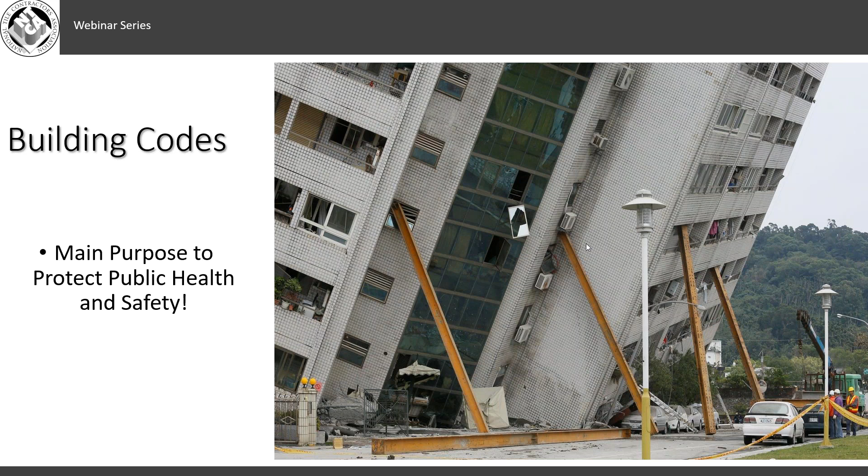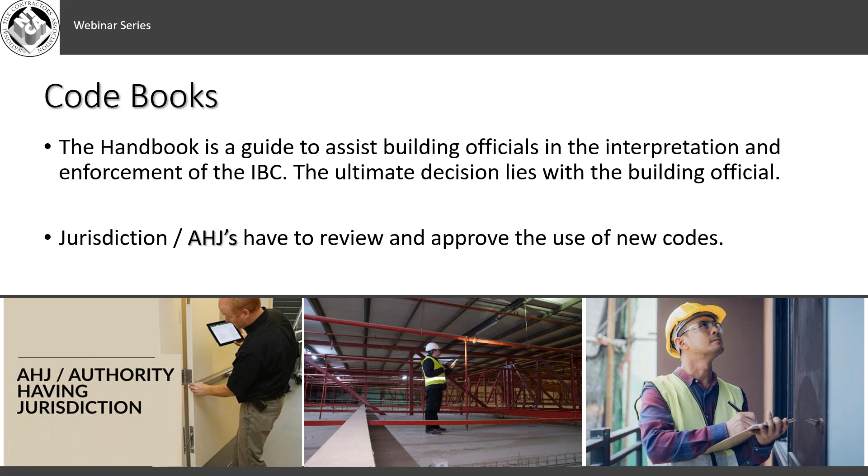So we have a whole series of code books. These are guides for the officials, or what we call AHJs, authority having jurisdictions, and they review these codes. There's a whole process as they update the codes every 3 to 5 years typically, and these are called our model building codes. Now, the 3 or 4 big ones: the International Building Code covers commercial structures. IRC, the Residential Building Code, covers single family homes, 2-family structures. So if it's a multi-family high-rise, that's going to fall into the International Building Code.

Again, single family homes, and then we have our two plumbing codes. It's kind of divided up which states cover which codes. And then there's a lot of other codes. Very important, of course, is the fire code, mechanical code, existing building, tenant improvement codes, that kind of things.

So these codes, depending on which code it is, are updated every 3 to 5 years. There's a very long update cycle. As soon as they publish a code, they actually start the revision process again. They're voted on, approved, go through a comment period, and then finally adopted as these model codes.

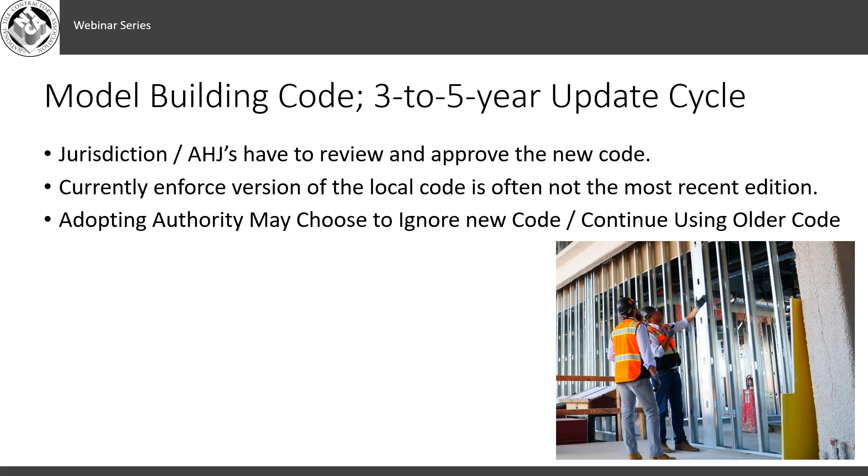The model codes are not law yet. They're just that, a model code, there for the taking for all the states that have it. They can choose to ignore these codes, or they can update them to the newer codes. So we're going to touch on this a little bit later, but the model codes have no legal status until adopted by the local authorities having jurisdiction.

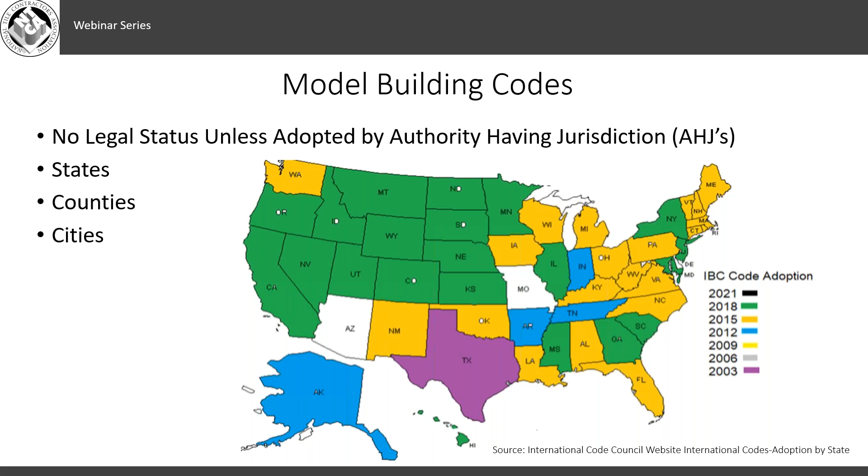So as you can see here, it varies widely by the states. In some of these states, there's a home rule that allows the counties and even the cities to adopt what they want. So until that state, county, or city actually adopts those codes, they're not enforced. We'll cover a little bit of the differences here, but you can kind of see it widely varies throughout the United States.

Now, the states reserve the power for these building codes given to them underneath the Constitution, the 10th Amendment. The exceptions would be buildings built across the United States, for example federal buildings built in each state but owned by the U.S. government. Those are going to have their own standards. Manufactured homes have a set standard because these can be built in one state, sold in another state. And the same process for these pre-construction, modular buildings they're putting up now. Those are going to be guided by one building code.

So we mentioned the home rule. Each state is allowed to do what they will. They can give the authority to the counties. They can give the authority to the local cities on whether they want to adopt these amendments or not. The authorities having jurisdiction, the localities can adopt these, and even the states can make it so that some have to adopt the whole code and can only make stricter restrictions. Some states allow them to change anything in that model code they want. So again, it varies state by state.

So when you're looking at the codes in your state, you want to check with your local authorities because they're the ones that are putting that code into place. They're the ones that are going to do the inspection. What we're giving you here is a general overview so you have an understanding of the codes. The new big change coming up is with the large format, large panel tiles that we have coming into play here.

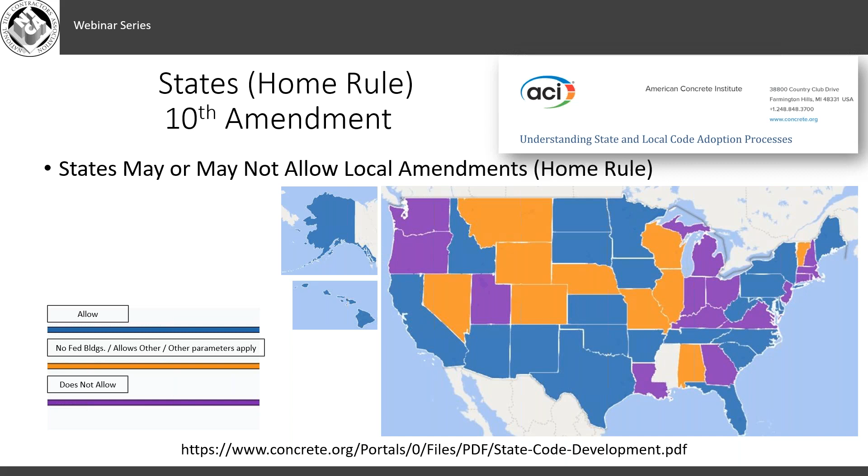So again, each state has local jurisdiction and it's a unique code for that state or city. These are enacted by the legislations, and that's why it's very important to empower the city council, giving them that. They empower the code enforcements. They can go out and do local code enforcements, whether it be the fire code, the building codes, mechanical codes, anything like that.

Now, the states again have the right to apply the code, and we talked about how different that is. So for example, Texas is using the 2003 International Building Code. They have not adopted any of the newer codes. They have very loose guidelines for construction, and especially for zoning. You can build a house right next to an amusement park, or an amusement park right next to a house. And so that will change which codes you're looking at.

So Indiana, in the blue there, you see some of the states using the 2012 cycle International Building Code model. In the yellow, they're adopting a little bit newer ones, 2015, and California and all the other green states are using 2018. So no one is currently under the 2021 IBC code yet. And again, the states have to review it and pass it on to the cities where they are going to adopt that code. For example, Arizona kind of skipped the 2015 code. They went from 2012 to 2018. They never went ahead and adopted it.

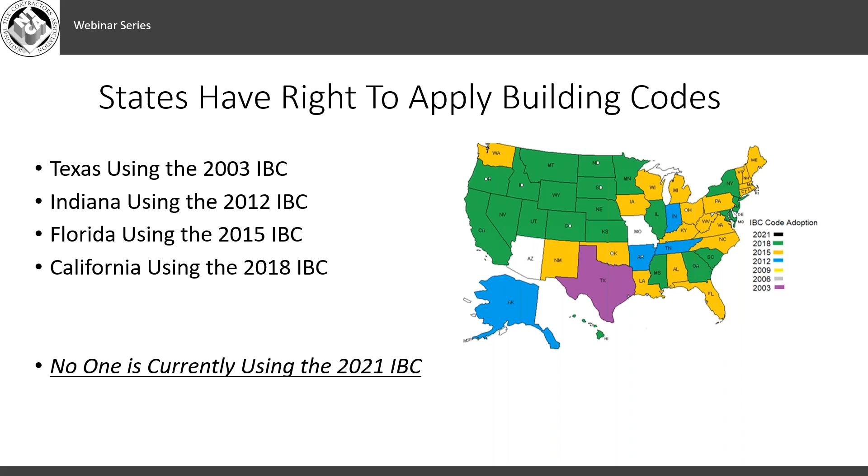So these are the IBC. They're produced by the International Code Council. Again, the International Building Code comes out every 3 years.

And now in Chapter 14, in the exterior adhered masonry veneer porcelain, 2021 is the big change that's coming up. So to give you a little view of what was in the past - not going too far back - in 2009, Chapter 14 adhered masonry veneers should comply with the Masonry Society Handbook, the TMS 402 and ACI 530, section 6.1, and this limited adhered masonry veneer unit sizes to 5 square feet in total face area.

And shall not weigh more than 15 pounds per square foot. Now, when I would go out to the code officials, the AHJs, and ask them about this, they would tell me porcelain tile did not have any code restrictions - and again this was only a couple. They would say this referred to masonry, whether it be brick, block, stone, manufactured stone, concrete tiles - those type of areas it would refer to. And some did kind of consider tile in the adhered masonry veneers.

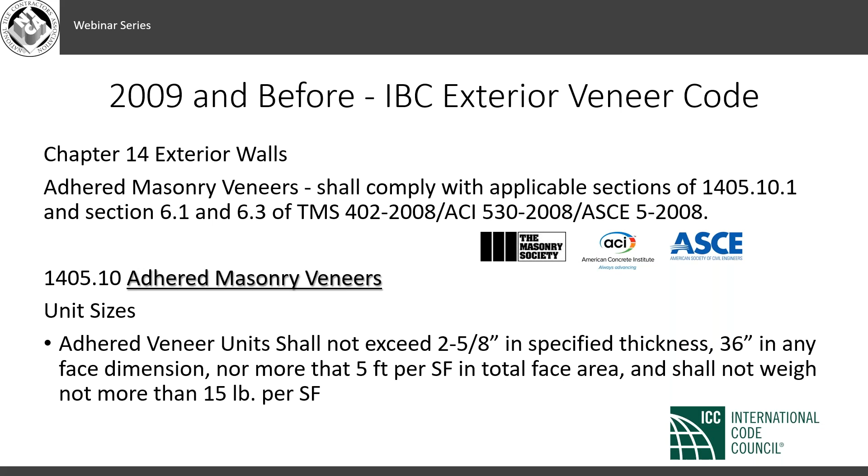Now, in 2012, they changed that code to reduce the area, size, and weight of that tile assembly. They reduced it quite a bit, down to 3 square feet in face area. So that was the big change there, and that really restricted us on what we could put on the exteriors of tiles.

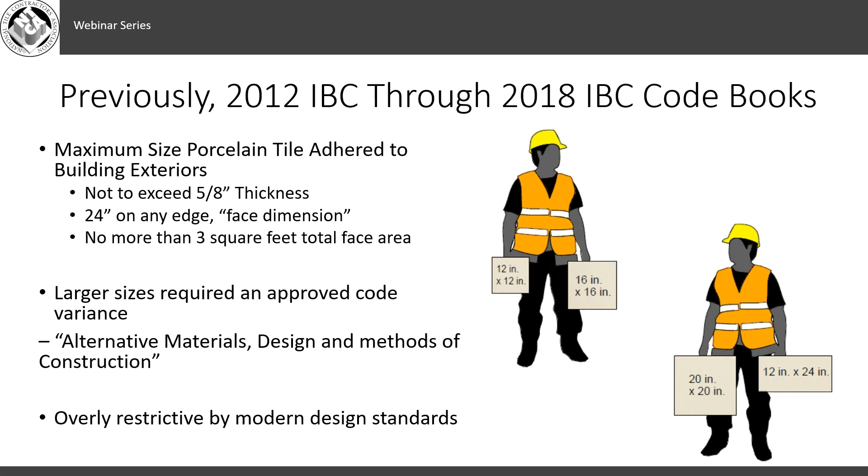We used a lot of times an alternative materials design and methods - this is allowed in the building code. In Chapter 1, there's actually a provision for this. They look back on the manufacturers of the adhesives to make these recommendations, and they look at past history, successful projects that have been in your local area. We'll talk about this a little more in Will's part of the presentation, but we can definitely use this in the past.

Just want to make the distinction between interior and exterior. Exterior has its own challenges because of the temperature differentials, the sun, the cold, the heat, the expansion differential between these - that's why they put the restrictions on. On the interior, adhered masonry areas have no size limitations, only by weight. So maximum weight for interiors would be 20 pounds per square foot. Now, as the adhesive manufacturer, I'd probably recommend only about 15 pounds per square foot. And for natural stone, just as a rule of thumb, this is typically going to be about 3/4 of an inch thick. This has not changed in 2021.

I just wanted to give you a little review of that. So again, 2021 has not been adopted yet. For example, the IBC Model Code 2018 was released January 2018. California reviewed it for a year, put it out, had comments, came back and adopted the building code in 2019, but it would not go into effect until January 1st, 2020. So that means the 2018 code has actually only been in effect for 1 year now. So it does take a while to publish these for the states to adopt them.

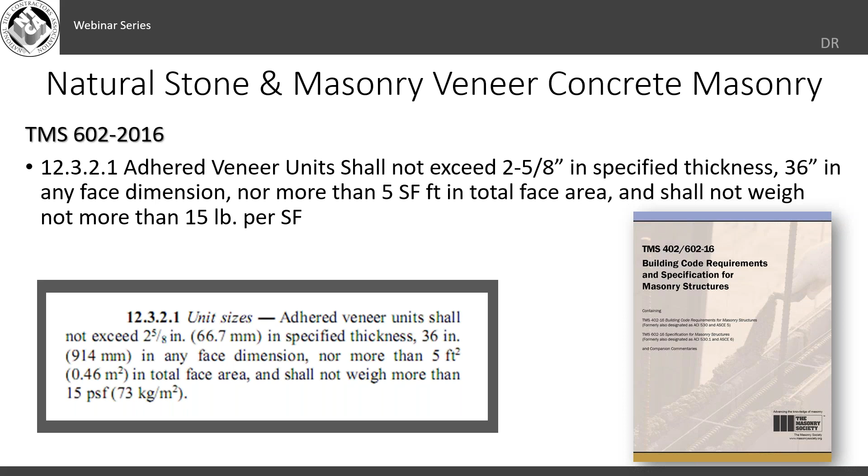We have to remember that's porcelain tile. Anything for manufactured stone, concrete masonries, natural stone, goes back to the old TMS, where the adhered unit shall not be more than 2 5/8 inches in thickness, 36 inches in any face dimension, and no more than 15 pounds per square foot. This is the requirement for masonry, manufactured stone, and this is not for the new GPTP thin panel slabs.

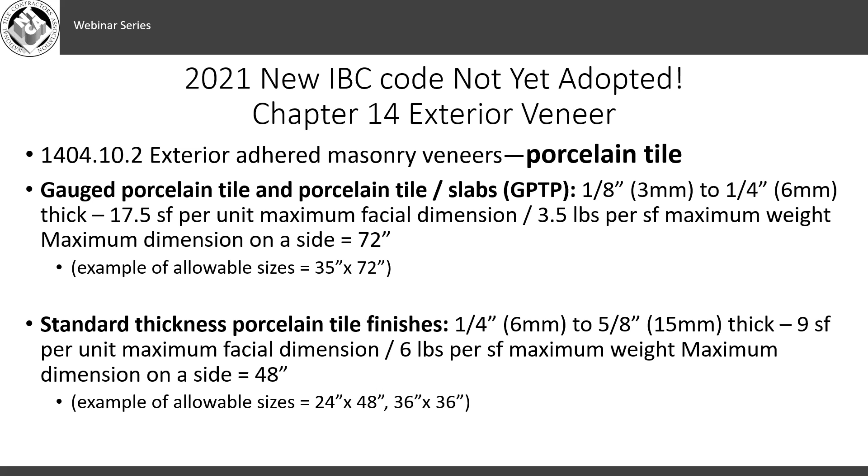One of the things is they do require at least a 50 PSI shear bond strength on that. I've been involved in testing of these after they've been installed. A lot of this is the type of mortar they're going to be using, the application of that mortar, and the coverage rate. The NTCA has the Trowel and Error video, which is excellent if you haven't seen it yet, on getting the proper coverage. I've seen one failure where they used the highest shear bond strength mortar, the most expensive mortar, but they were only getting about 50% coverage on that back.

They tried to use a crosshatch system where they troweled or combed on the substrate in one direction, and thought they would get better coverage if they troweled in the opposite direction. They never got the ridges to collapse - basically the ridges were just sitting upon the ridges. So they got very low bond strength, but just barely passed this 50 PSI shear bond test. They would have had to take out all the tile on that building if they hadn't met that. So it's very important to hit that and get the proper coverage.

A lot of times it will take back buttering. It's very difficult to get these walls that flat that you can just comb it on the substrate, but back troweling is the new terminology that we're using these days - flat troweling that backside of that porcelain tile.

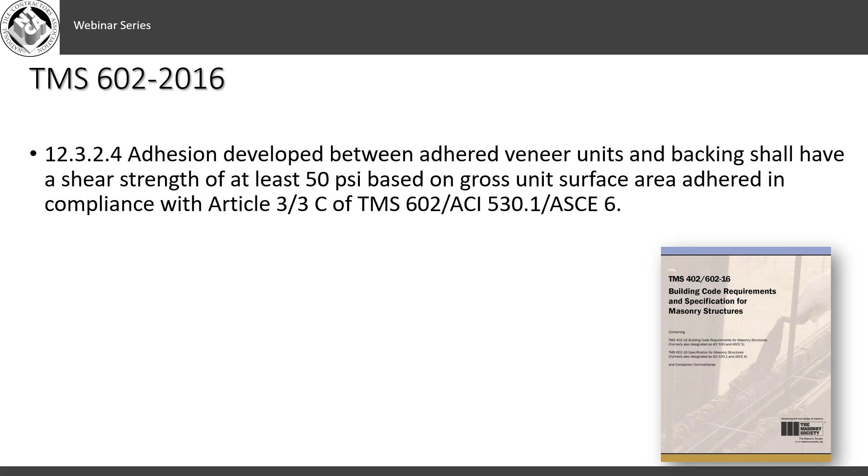Commercial buildings, there are no restrictions for the height. Now, all the time I say hey, there are restrictions - it's 20 feet, it's 30 feet - but in the International Building Code, for commercial buildings, there are no height restrictions, as long as they get that 50 PSI, as long as they can control and restrain differential movement, there's no sagging of those studs or buildings, no deflection in those walls - we can go as high as we want.

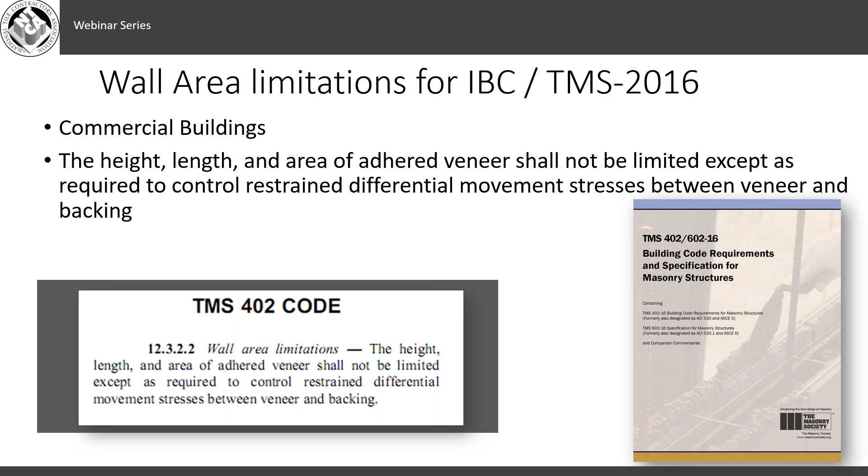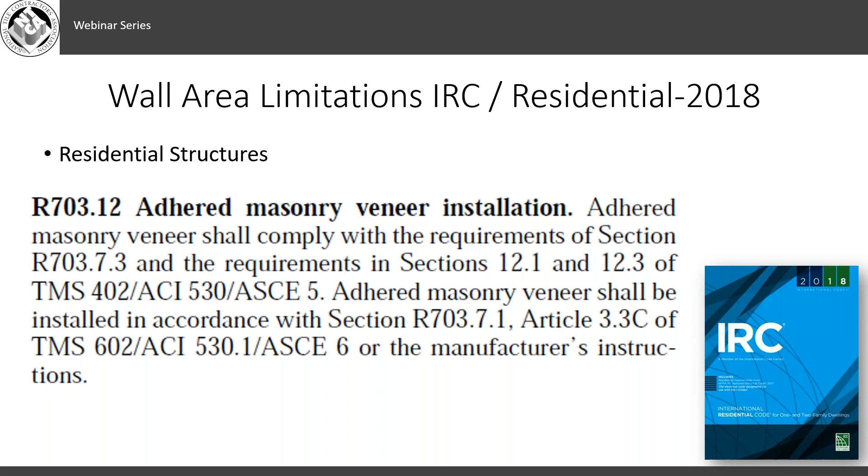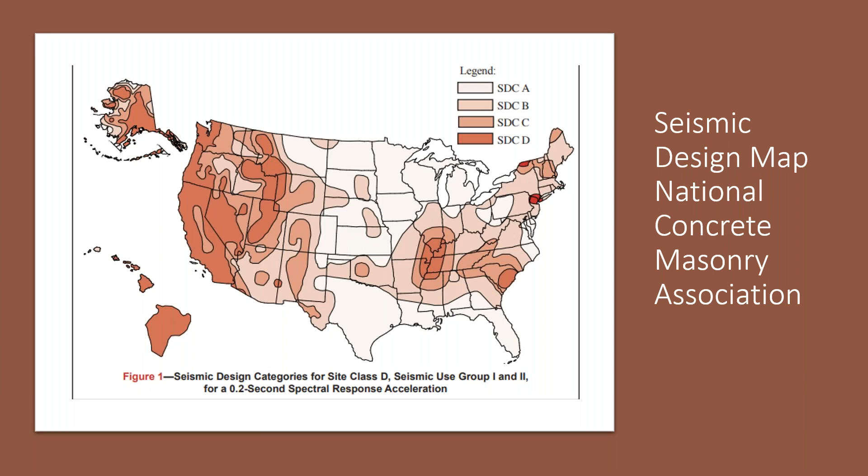Now, I have to bring up that that's different than residential. Again, single family homes, there are limitations on the wall area, how high you can go. They have a chart that's dependent on the seismic map, so it's going to be different across the United States depending on where you're located and which zone you fall into. I'm in Southern California, zone D.

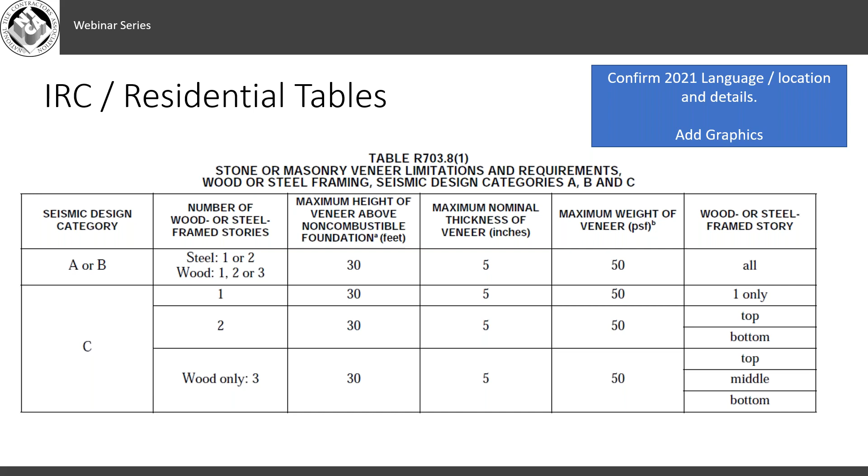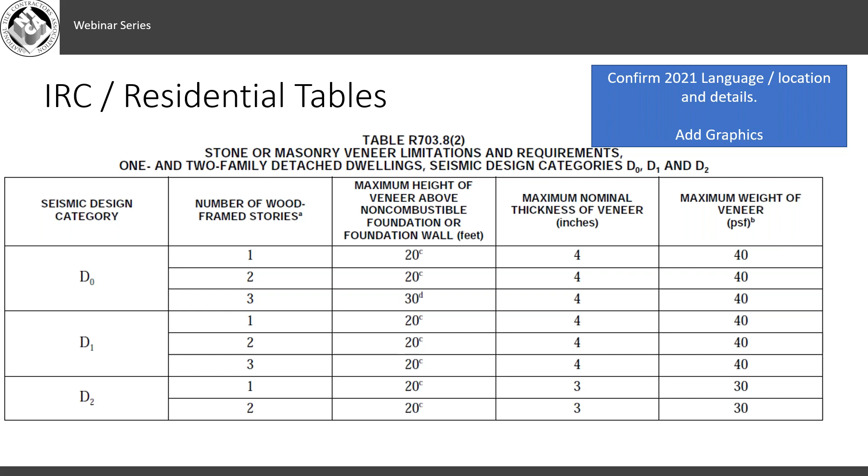Here's ABC, maximum height of veneer above a non-combustible foundation, 30 feet. So that's where you usually hear that, well, you can only go 30 feet high - single family homes, yes. And in SoCal, 20 feet high. Generally that's a 2-story building, so it pretty much covers everything anyways. In residential, you usually don't see too many over 20 feet, so that'll generally fall into that category.

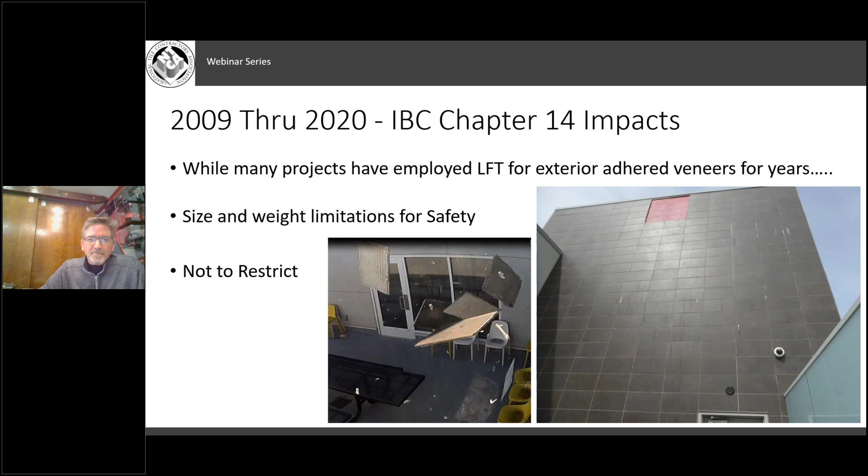Sure, and I'd like to mention that happens more often than you would think. We actually had a building - they had no way to get the moisture out of the wall assembly, and there was no cap on top of that parapet, so moisture was going right down inside that, rusting a lot of that stuff, and you were seeing failures caused by just architectural failure, basically.

The Chapter 14 impacts we've been working through for the past decade have created design challenges, often requiring architects to respecify exterior veneer materials. In some cases, especially with gauge porcelain tile panels, a secondary fabrication method has been required to change sizes to meet current restrictions. Gauge panel manufacturers have begun offering different sizes, not just for exterior but interior use as well. That's definitely played into the code limitations that currently exist.

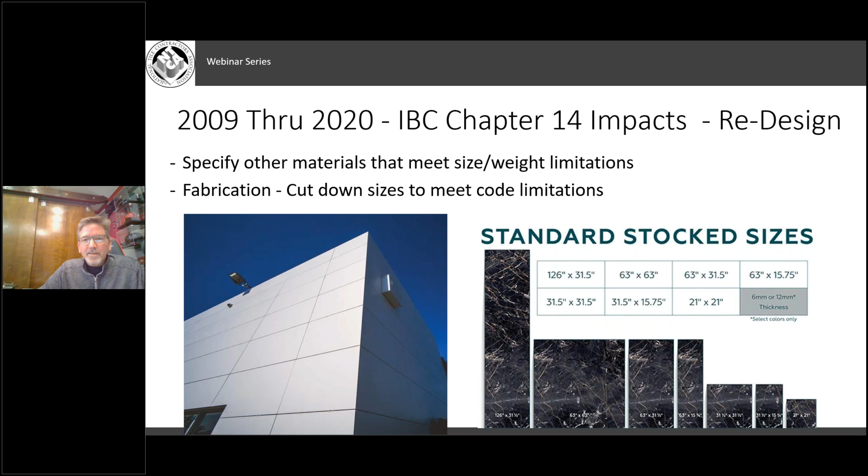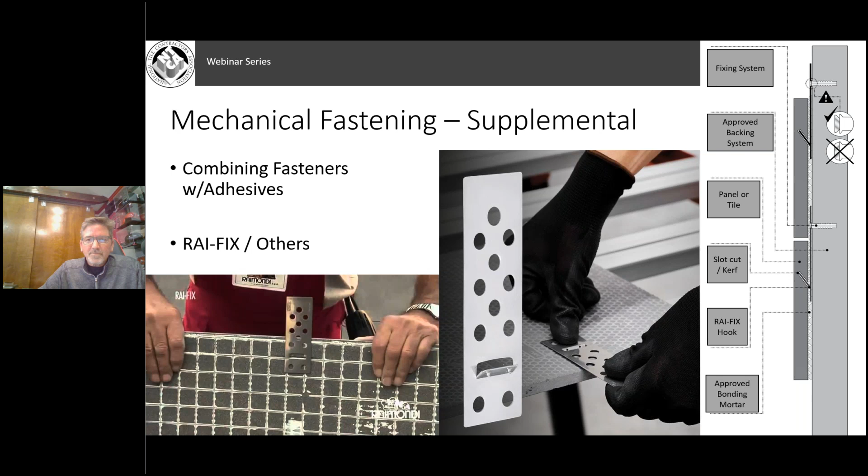Mechanical fastening systems are supplemental to an adhered exterior veneer installation method, working alongside current code limitations. These mechanical systems have gotten more popular and played a key role, enabling installations across various states as an adjunct to the installation assembly. You'd typically use this when your code official had reservations about using tile in a direct adhered system on the side.

This gives code officials confidence to use a direct adhered system along with a mechanical fastening system. Let's talk about the alternative materials process in the IBC, found in Chapter 1, Scope and Admin. It clearly states that codes are not intended to prevent installation or design methods, but to promote safety. This allowance enables alternative materials or larger formatted tile bodies, and has been utilized quite a bit for gauge porcelain tile panels to enable design methods. This is commonly referred to as a variance request — the graphic on the right is a template used on many projects.

Dale, I don't know how many projects you've worked on that have gone through this process. Several. In the old days it was a little tougher, but with the new 2021 code having those larger format tiles, it's pretty much a slam dunk now. In the old days, the liquid applied waterproofing membrane wasn't in the building code, so it was very tough to get approved. But once it was included for a couple years beforehand, substitutions became much easier. It'll be the same with these large porcelain panels — much easier to get approved as an alternate method of installation.

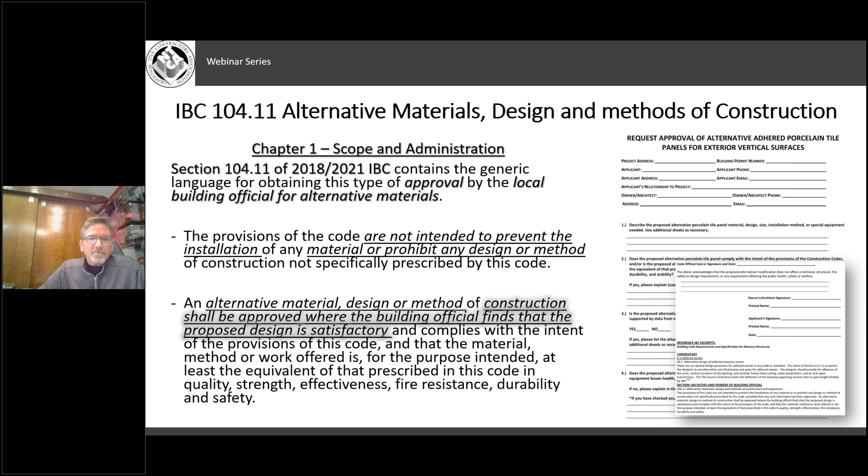Let's talk about the 2021 changes. What really drove the recognition by the IBC and ICC was new technologies with gauge porcelain tiles and ordinary porcelain tiles getting thinner, reducing weight loads — a major concern — along with material definitions for gauge porcelain tile panels published through ANSI A137.3. Also key was the development of the improved modified dry-set cement mortar standard ANSI A118.15, showing much higher bond strengths, partnered with certification for standard tiles through CFI and CTEF, as well as gauge porcelain tile panel trainings executed by manufacturers like ourselves, panel manufacturers, and the ACT program. New tooling developments, even simple things like trowel redesign, have helped improve contact and coverage, well exceeding 50 PSI on an average basis.

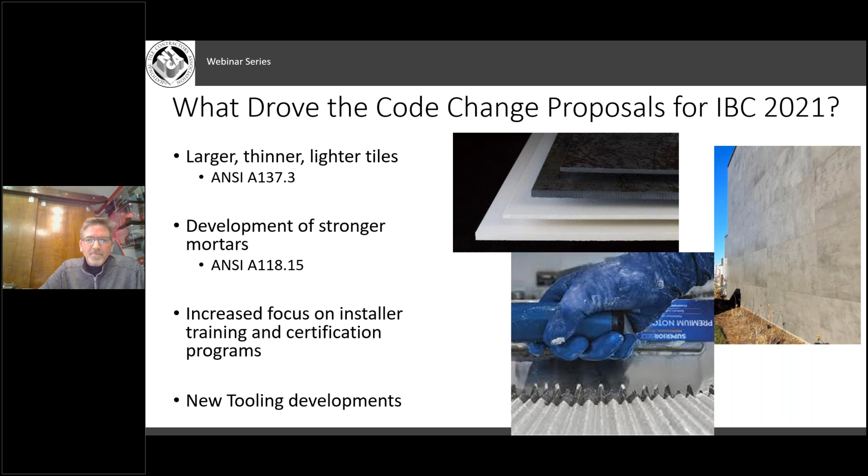The minimum shear bond value of A118.15 is 400 PSI, so I'm absolutely certain that with proper installation, it well exceeds the 50 PSI, and the modification in those bonding mortars can well sustain expansion and freeze-thaw cycling. Just don't forget your movement joints when designing and installing adhered veneers — those are very important. It's critical to get that EJ171 expansion joints detailed by the architect and design engineer.

Let's talk about when this was submitted. It was actually submitted in 2019, but preparatory work began well before that. The proponents were the International Masonry Institute and the Tile Council of North America, supported by NTCA and manufacturers as well. We all felt it was long overdue, and agreed we had all the right components together to create confidence in the changes proposed.

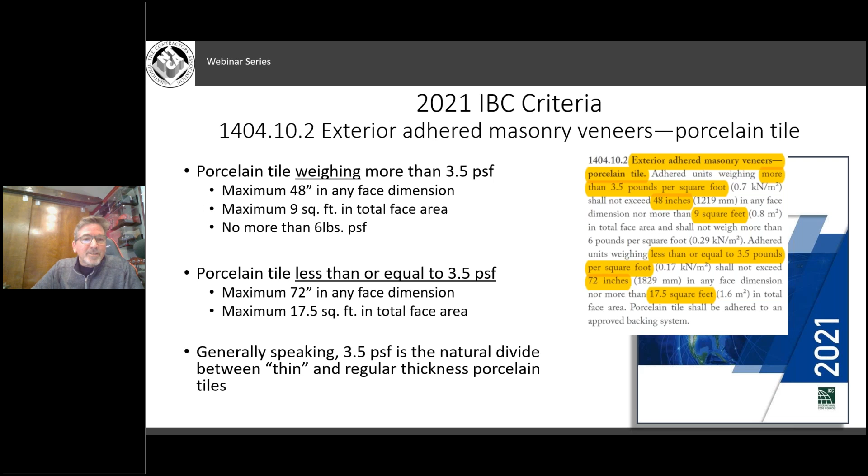Just some visuals, you may have seen these before. I love these visuals, it makes things very simple. Now we're past the 12 by 24s, into 24 by 48s for your average tile weights, even into 36 by 36 for your average porcelain tile. So that's at or greater than 3.5 pounds per square foot.

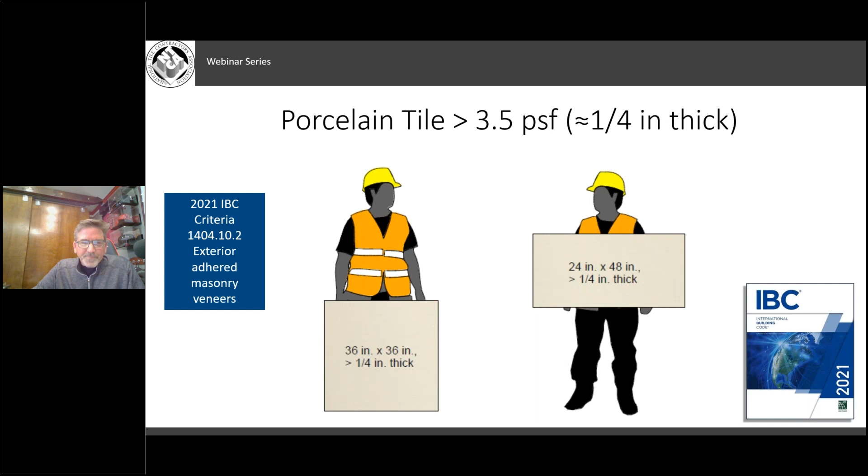I guess I'm getting a little long in the tooth. When I was installing tile, 18 by 18 was big and 24 by 24 was huge, and we were putting those on the floor. I just can't imagine guys doing 36 by 36, and now even 6-foot panels on the exteriors of buildings. Technology has really changed - not just the adhesives, but the weight and performance of the tile and the thickness of the tiles too.

Now less than 3.5 pounds per square foot, you can go much larger. It makes sense, it's all weight based.

Then we get into the gauge panels. These sizes were coordinated with the tile manufacturers that makes sense for generic panels manufactured - how can we cut them up, what makes sense, the least amount of waste. So there was definite coordination between the IMI, TCNA, and the tile manufacturers. In particular, these 36 by 72s are going to be your maximum dust press size, and then those sizes work out well into the plate or roller press for the gauge porcelain tile panels as well.

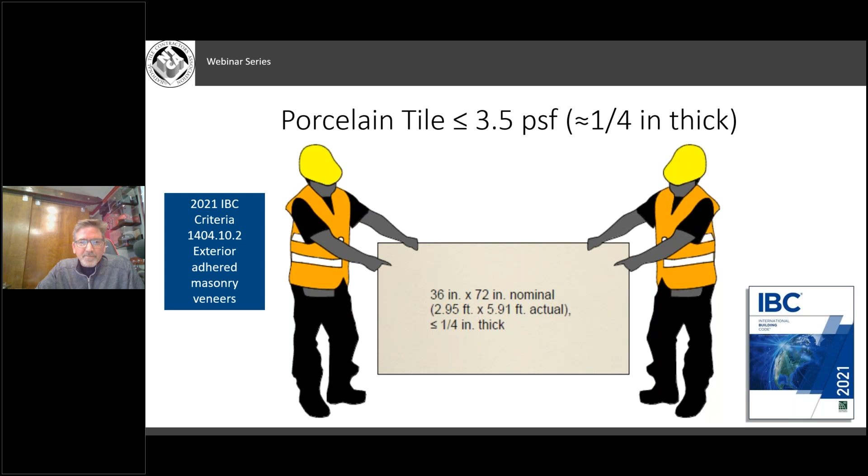For these gauge porcelain panels, that size has doubled from last year's code. All this timing works out well. During the lobbying efforts in 18 and 19, we had the existence of ANSI A108.19, the interior installation for gauge porcelain tile panels, and also the material standard A137.3. Post that lobbying effort, we were working in the ANSI committees on the exterior installation of gauge porcelain tile panels, which is now available as A108.20. So that completes that scope for the gauge panel tile market space - you've got a material standard, interior and exterior installation guidelines in place, enabling more use of that material along with the IBC changes.

We feel that working on the installation portion now is probably a focus on the last remaining pieces of the puzzle, as well as working with architects on overall design assemblies, especially those firms that may have been a bit hesitant to move into this segment with larger tile bodies or panels for your exterior adhered veneer systems.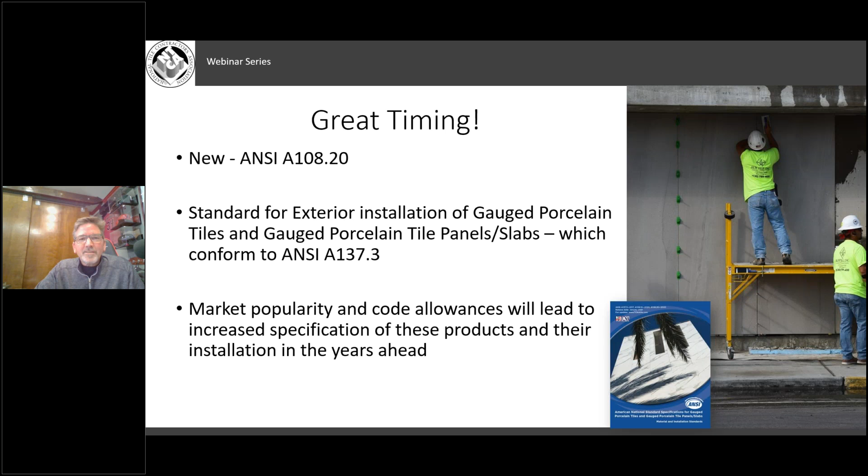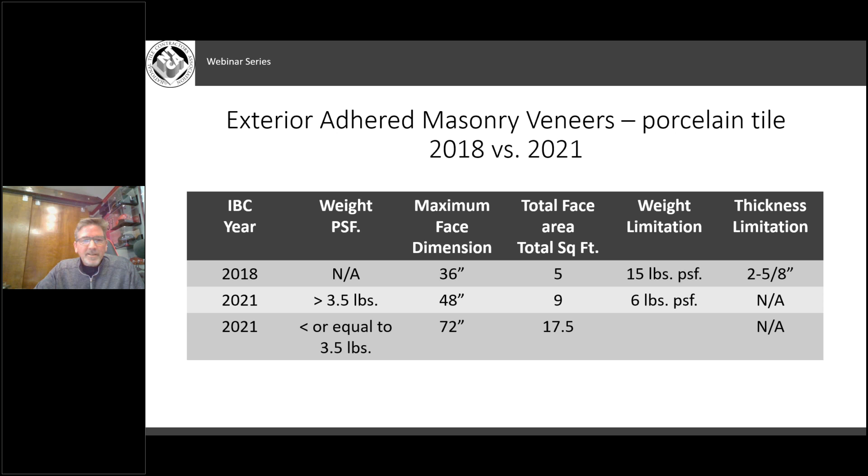Just a quick eye chart on the changes from 18 to 21. You can see this is quite dramatic, but it's dramatic because the restrictions in 18 were really long overdue to be updated. All the timing worked out, all the parties came together, and we're very excited and confident moving forward.

Just a note, in the changes you'll find in your minimum thickness of weather coverings, there's been updates as well. You can see that the porcelain tile has been modified from 0.25 to 0.125, and that's for the obvious inclusion of gauge porcelain tile panels.

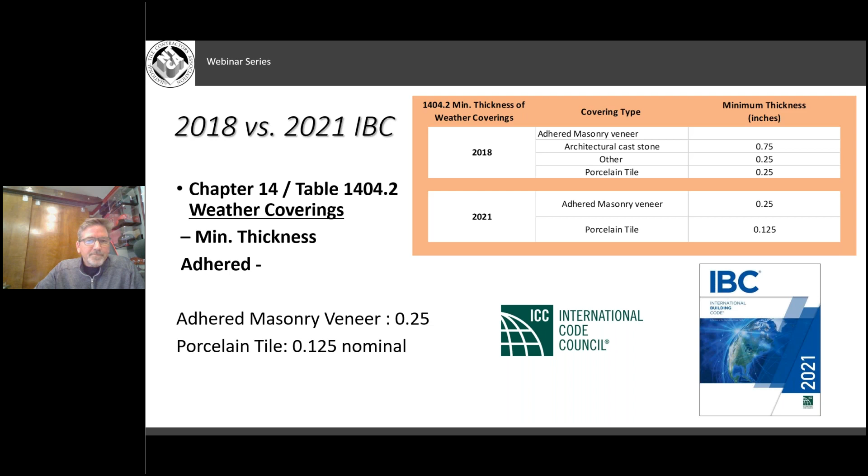Bill, the floor is yours, sir.

Thanks Dale for the thorough walkthrough of the upcoming changes, which I echo. We're very excited for jurisdictions over the next couple of years to start talking about the most efficient adoption protocols. In that light, I want to close out today's talk by discussing bigger picture - the importance of tile industry relevance in the code. The tile industry, perhaps more than our competitive industries, is a very technical industry. We have a lot of standards, a lot of specifications, a lot of attention given to standards so that we can ensure floors, walls, and surfaces are covered safely and effectively.

And in the spirit of the building codes here, we want to make sure that those standards are translated into the criteria that are adopted around the country. So we talked so far today all about walls, exterior walls, interior walls. So what about floors? Want to go to the next slide, please, Dale?

When we think about safety on the floors, the first thing that comes to mind is slip resistance. That's something that we have a real opportunity for improvement in the codes, especially with the advancements we've made as an industry in developing standards, developing test methods, and setting thresholds within our specifications.

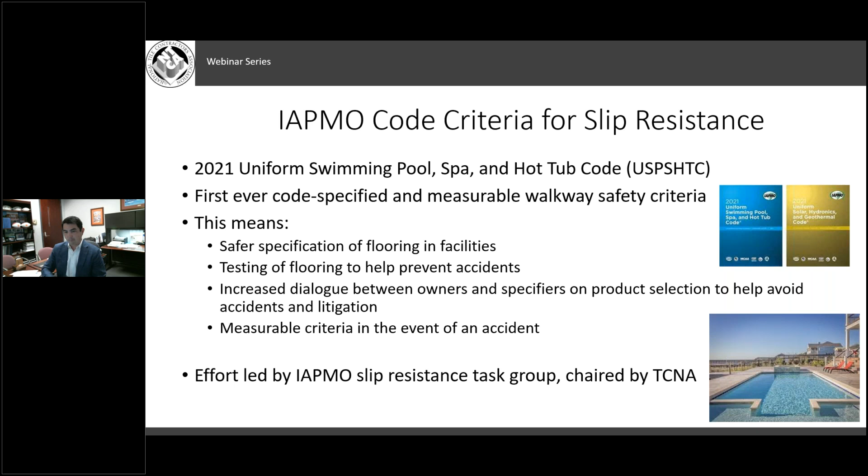Yeah, exactly. Thanks, Dale. So what are the criteria? Well, for level surfaces it's exactly what we say in our industry standard ANSI A326.3. The minimum dynamic coefficient of friction is 0.42 if the floor is expected to be walked upon when wet, which, as you can imagine, in swimming pool, spa, and hot tub applications, the answer is almost always yes. Really, in all flooring scenarios, the answer is almost always yes, because any floor can become wet at any time. But not to get too far into the philosophy of slip resistance.

The good news for the industry is that's the standard we're already specifying in all of our industry standards. 137.1 for tile, 137.2 for glass. Both reference this A326.3 standard, which is also developed by the A108 committee.

When it comes to incline surfaces, it gets a little bit more tricky. We don't have a tile industry standard for the minimum DCOF on incline surfaces. However, it was important to the code developers under IAPMO to have some objective criteria, and so their solution is quite clever. They base it on the level 0.42 requirement, but that minimum value gets corrected. They call it a minimum corrected DCOF, and your minimum DCOF is dependent on your angle.

The formula you see there, to take you back to your high school trigonometry classes, you need to know the angle of your ramp, which you can pretty easily calculate if you know the slope - X feet and X and 10, whatever it may be, a 1 in 10, 2 in 10. You can calculate the angle, then insert it into the formula. You can see 0.42 is in the formula as the basis, and once you crank out that calculation, you have your standard DCOF based on the angle of the ramp. So level surfaces is 0.42, and incline surfaces is whatever the answer is when you put your angle variable into that equation.

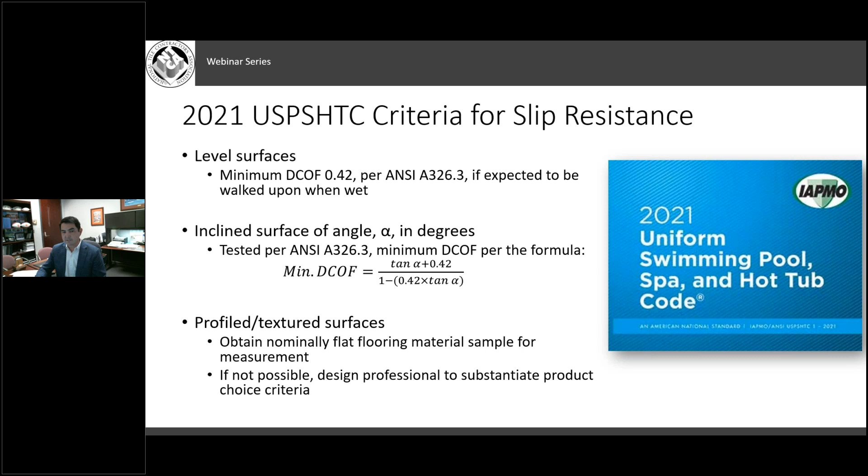So let's talk about these measurements. I alluded to it earlier, but the standard is ANSI A326.3. This is for those level and incline scenarios where you can obtain a dynamic coefficient of friction measurement. It's the standard under the A108 committee, and it's simply the bot that slides across the surface and gives you a measurement.

I want to note that TCNA has made this standard available for free because it's a safety standard, and in the spirit of making safety standards as accessible as possible, as publisher of the standard, TCNA does not charge for it. So you can go to our website, download the standard for free to learn more about DCOF and how the measurement is taken. And of course our laboratory, as we offer a lot of testing services per our industry standards, is very experienced in running this test and available for hire.

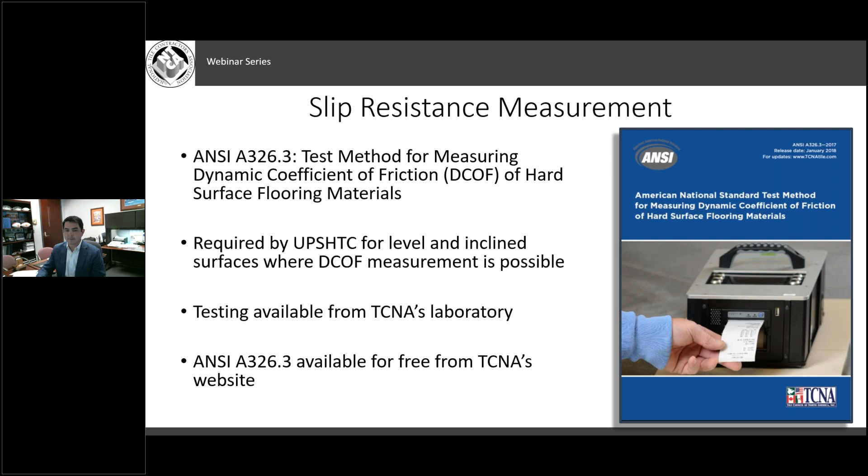So what about those scenarios - that's scenario 3, where you cannot take a DCOF measurement and the power is all on the specifier. Well, there still needs to be some kind of way for the industry, the specifier, and the designers to start to communicate so that it's not totally subjective.

And there is a handy test called the German ramp, based on a DIN standard 51130, and it's exactly what it looks like in the imagery here. You take a flooring sample, put it on the floor, lubricate it with oil, and the technician walks over it as the incline increases. As it increases and increases, when you detect that first slip, you measure that angle, and based on that angle you can get a variety of descriptive classifications that give you an idea of slip resistance properties and where this flooring may be recommended.

As you can imagine, it's not an ideal test for on-site testing in a code inspector environment. However, this is good for R&D purposes, and it's good for specifiers if they're completely in the dark and need to just have an idea of how slippery a surface may be. At the very early stages of design, it's a handy way to communicate, and our lab offers this service as well. We anticipate that this standard will get more and more traction - no pun intended - in the U.S., as people start to look for any resources they can to educate themselves on the slip resistance characteristics of flooring.

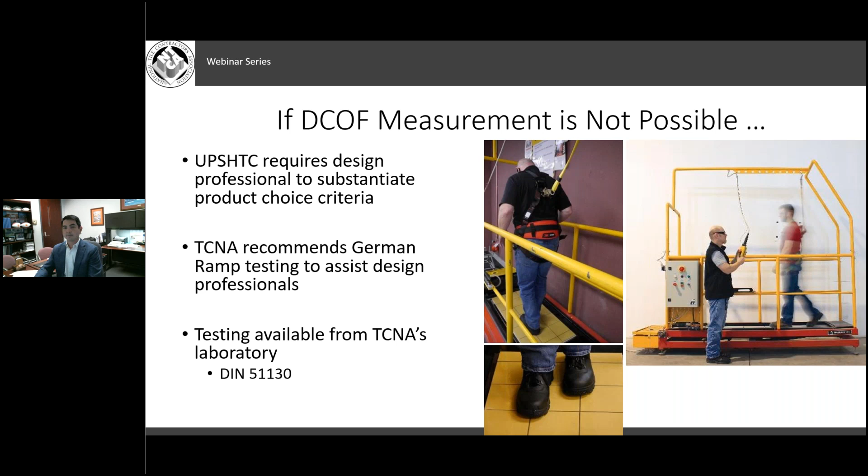So that was IAPMO. Again, we're pleased that the IAPMO criteria for the pool and spa code are an important first step in getting objective code criteria established. We're optimistic that that'll open the door for other improvements, not just in the IAPMO codes, but perhaps in other code organizations such as ICC.

Because what's currently in the International Building Code, section 1003.4 on slip resistance, Dale, I think you said it earlier, all it says is circulation paths of the means of egress, which basically means any flooring in the building that could lead toward an exit strategy. It just says they need to be slip resistant and securely attached. That's all it says. No minimum threshold, no standardized method of measurement. This is ambiguous and problematic for all the reasons I mentioned earlier.

And in fact, the industry has worked with several code proposals over the years. TCNA and others have collaborated, dating back to 2012. But it hasn't been easy because awareness around our standards hasn't been there, and precedent set by other code organizations hasn't been there. But with this precedent set by IAPMO, and with more awareness and familiarity on the subject, we're optimistic. The industry is going to continue working to improve the criteria in the spirit of safety, with the intent that the best available standards are referenced.

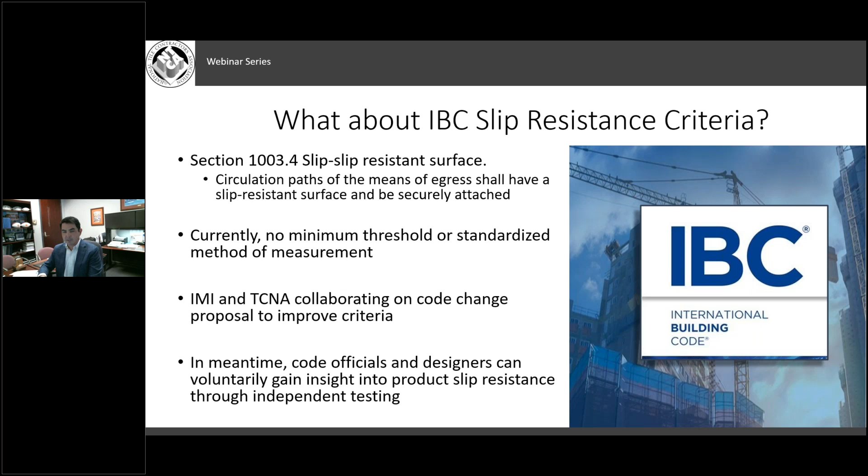Okay, I'm going to take the last few moments here to talk about green building codes. Perhaps many of you may not be as familiar that there are green codes as well. This isn't exactly pertinent to the 2021 changes, but it's still relevant to the discussion, because just like with the International Code Council, we have the plumbing code, the mechanical code, the electrical code, the fire code, we also have the green code. Similar to those other codes, they're called framework overlay codes. That means they're not the building code in its entirety, but they're designed to coordinate with the IBC or the IRC and overlay those codes to enhance their provisions, in this case in terms of sustainability.

And so again, this only becomes a legal matter if municipalities adopt it. But since the release of the IGCC, the major code-savvy states, the ones that have been most up to date in their building code adoption, have actually adopted this to a pretty large degree.

The 2018 code, not as much, but a lot of the provisions I'm going to share with you here date back to the 2016 and 2014 codes as well. The International Green Construction Code was originally developed by the ICC. There was a similar competitive model code, not by ICC, but by ASHRAE, called Standard 189.1, which was very similar to IGCC. As of the 2018 release of IGCC, those were merged into one document called IGCC powered by ASHRAE Standard 189.1. It's still widely referred to as the Green Code.

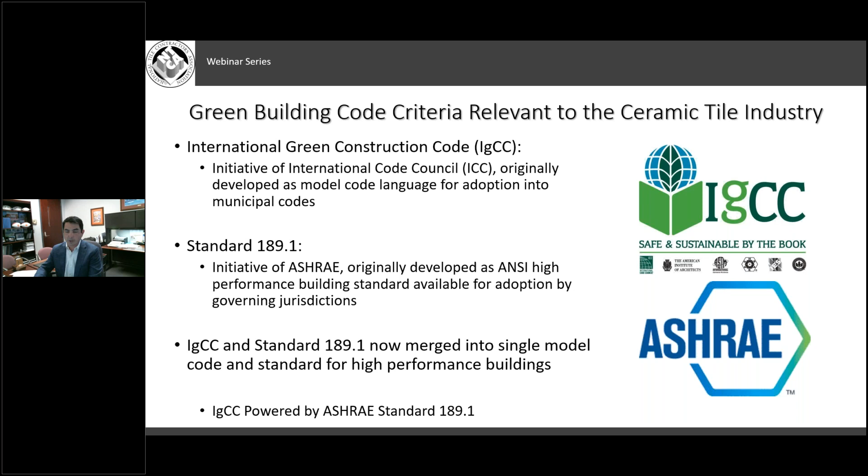So what are the criteria relevant to the tile industry? We talked about floor safety, mostly slip resistance. Walls, mostly we talk about do the tiles stick to the buildings. Now with floors and walls combined, from a...

sustainability, safety, and health standpoint, the Green Code, what do we talk about? Well, we talk about either meeting industry standards, similar to other stuff we ran through earlier, and we talk about whether the product is transparent in its environmental impact.

This is the section most relevant to the ceramic tile industry, 901.4.1.4.3 in IGCC. What you see in the parentheses there is important to note, because as you read through the codes, you'll see these parentheticals, which show what it would be called if you're speccing it in an ASHRAE state versus, not in parentheses, what it would be called if adopted in a jurisdiction that's an ICC state. Just a little technicality to keep in mind.

But it requires at least 10 products in the entire building either have an environmental product declaration, which I'll explain in a moment, or meet an industry standard certification program for sustainability, which, in the case of tile, is called Green Squared.

These criteria were introduced in 2015, and I list the organizations here so you can see there were some pretty heavy hitters. Tile was represented by TCNA, Carpet and Rug by CRI, the vinyl flooring industry by the Resilient Floor Covering Institute, but you also had US GSA at the table for this code change proposal. You had the EPA, and you had the major certification organizations, NSF and UL Environment, among several others. The reason I list those is because we were...

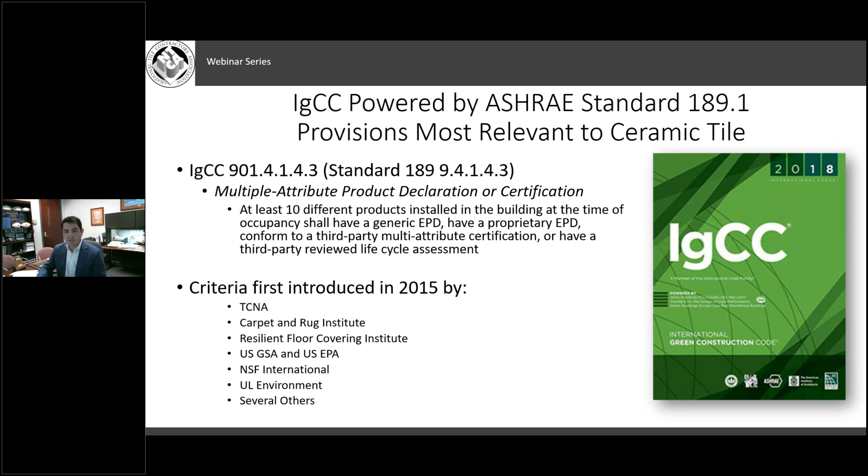So that was an important thing to note as our overall goal for the tile industry to become increasingly relevant in these code safety, health, and sustainability discussions. It's a good thing we were at the table then.

So the criteria require, again just to repeat, 10 products either have an EPD or meet and certify a certification program for the relevant industry.

What is an EPD? I'm not going to get too far in depth here, but just so you know what it is: it's an industry-transparent, standardized way of reporting what the environmental impacts are. The analogy we like to use is like a nutrition label for building products.

And we have one in the tile industry. In fact, we have 3 industry-wide EPDs, which I'll speak to you about in a moment. But these industry-wide EPDs are specifically called out in those criteria I showed you on the previous slide.

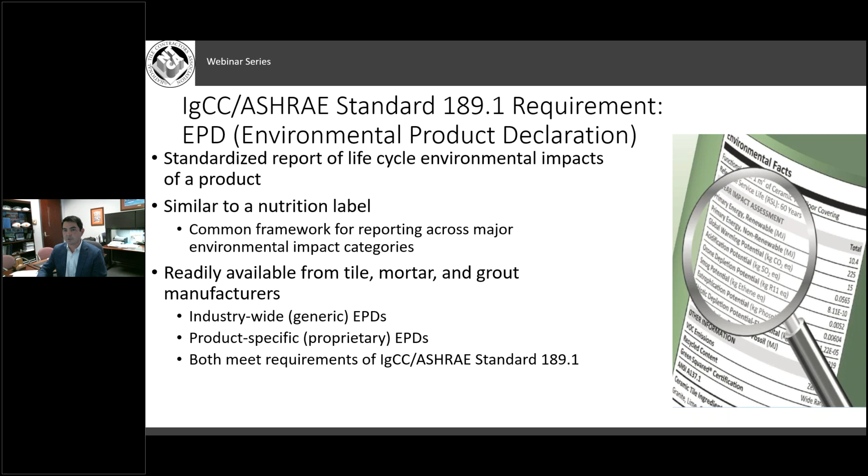So the 3 EPDs: we have one for ceramic tile, we have one for mortar, and we have one for grout. Why is this important? Well, the cool thing about specifying tile to meet code criteria, if the criteria require 10 products have these provisions, just by specifying tile, you're going to need a mortar, you're going to need a grout, so you can cross out 3 of your 10 products in the whole building toward code compliance.

These are the North American companies represented by our North American EPDs. I should note it doesn't have to be North American companies—the Italian Manufacturers Association has their industry-wide EPDs, as does the Spanish. So most tile products, if they're major players, are pretty well covered by our host of industry-wide EPDs. North America is the only region that has industry-wide EPDs for mortar and grout.

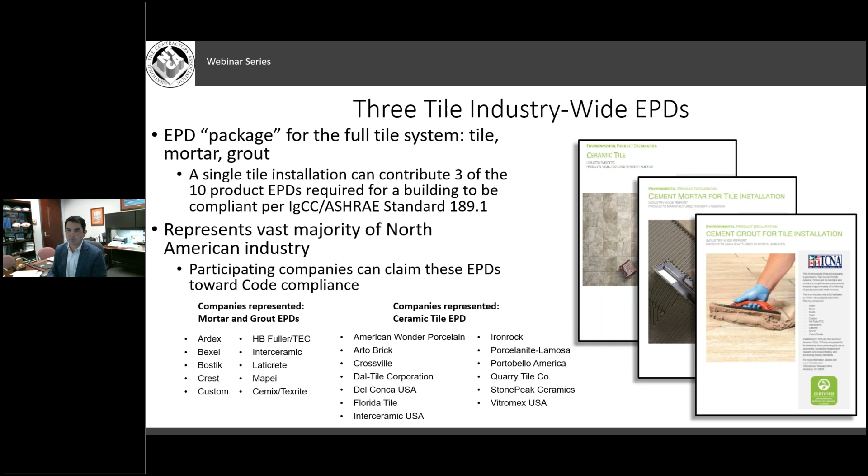So the other half, the product specified, you've got to have 10 that at least have an EPD or that are certified to meet a standard. In the case of our standard, it's ANSI A138.1, commonly referred to as Green Squared. In fact, the certification around the standard is called Green Squared. So by specifying Green Squared certified products, it means you're specifying products certified to meet the A138.1 standard, which means they meet a host of criteria.

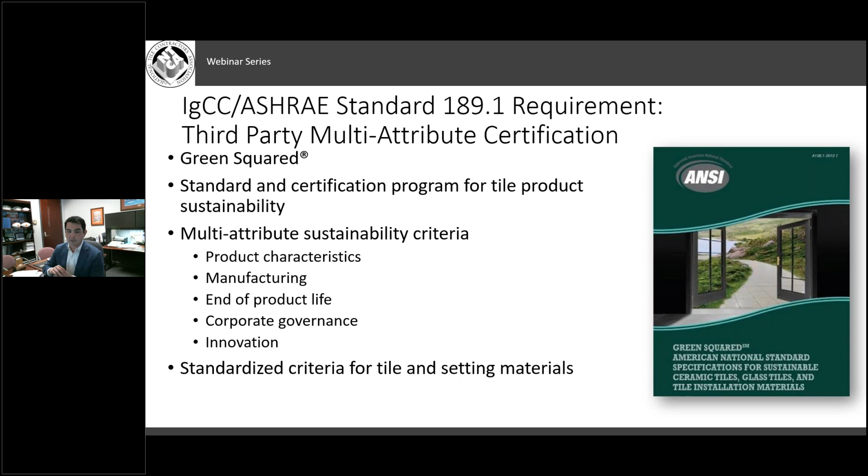It's not just one definition of sustainability. It's what's called a multi-attribute sustainability standard, where it takes recycled content, VOCs, regionality of the manufacturers and proximity of the manufacturing to raw material sites, social criteria, making sure they follow all the protocols that are internationally recognized for labor—everything you can think of that we define as green is encompassed in this standard. So that's our industry standard, not just for ceramic tile, but for the whole industry, for tile setting materials as well.

Just to touch briefly on Green Squared certification, if you see the logo there, then you know it has been certified to meet the standard by one of our independent industry-approved certifiers, either UL or SCS. In fact, you can visit greensquaredcertified.com to find a list of which products bear that logo. You can also access a list of products through UL and SCS's independent libraries.

One thing that's interesting to note is you can have products that either meet the EPD or the Green Squared standard—they count towards that 10 product threshold in the green building code. But if a product is included in those EPDs and has Green Squared, it counts double, so it counts as 2 of the 10 requirements. So theoretically, you could specify a tile installation with a mortar and grout that are Green Squared certified, and a ceramic tile that's Green Squared certified, all of which are included in the EPDs, and you've checked off 6 of your 10 products. Something interesting to keep in mind.

So that's how I wanted to close. It's clear the industry, when we think of floors, thinks of slip resistance in terms of safety the most. When we think of walls, we think of everything that Will and Dale went through. When we think of floors and walls combined, we think of the sustainability aspects of the code. There are other areas of relevance for the industry in the code, but that was a good highlight of the ones we're focused on most in 2021. So with that, I'll hand it back over to either Dale or Will to close this thing out.